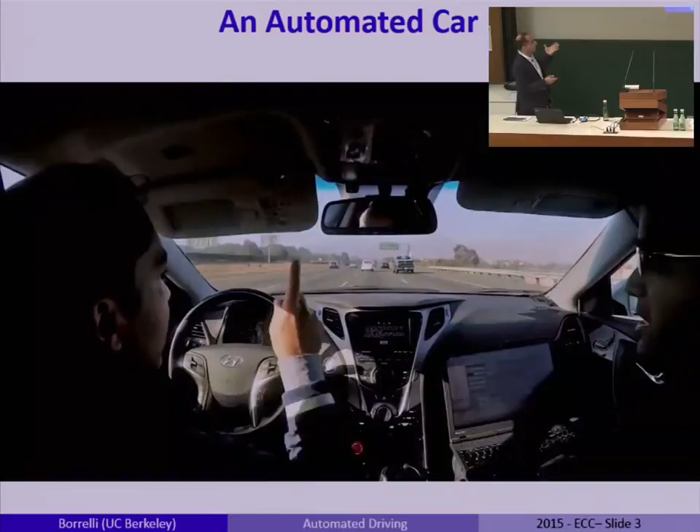This is an automated car. This is me driving towards Sacramento. It keeps the lane, it keeps the safety distance from the front vehicle. If you want, it can also steer. Why would you want to do that?

Three main reasons. There are 40,000 people that die in the US every year. Europe has the same numbers. They say that if you put all the world together, it's like a Boeing falling from the sky every day. If you can coordinate autonomous cars within smarter cities and traffic lights, you can reduce carbon emissions, there's no doubt about that. And most importantly, people want to look at their phone instead of driving.

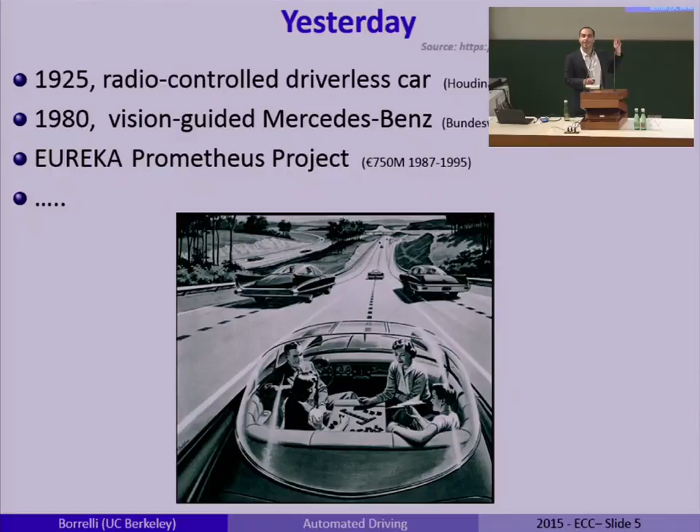So it's an old problem, right? In 1925, there was the first demo. You can look at Wikipedia. Europe had a lot of projects in the 80s with Mercedes-Benz. And if you follow this area, today you are overwhelmed by news about self-driving cars. You can read by yourself. I like this article from IEEE Explorer: 'Cars may think, but will they achieve artificial stupidity?' FBI, the ones that can be used as lethal weapons.

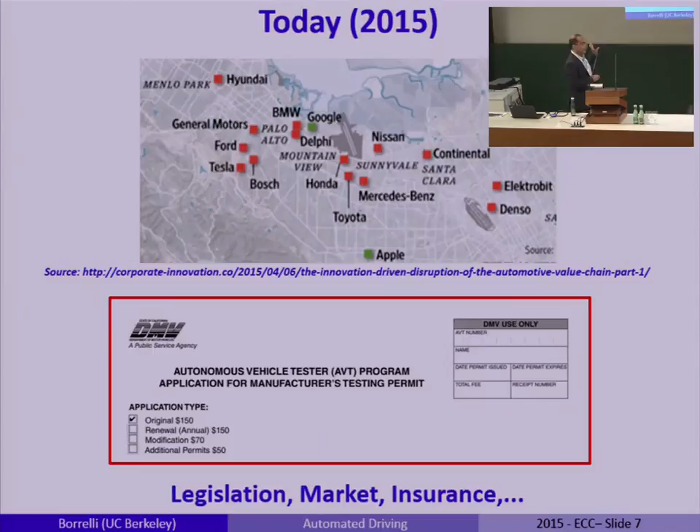Also, what is true, today in California you can get an autonomous driver's license. If you are an entity like UC Berkeley or Hyundai, you can apply for this. It doesn't cost much, and you can let your vehicle drive on the road. So things are changing from a legislation, market, and insurance point of view. I'm not going to talk about that.

This talk is going to be about how we engineer automated driving with a focus on control. I have 3 goals for the next 15 minutes or so. I want to give you an overview of our research activities, just an overview. I'll share with you a parking example that you can use in your advanced control class if you teach one. And I'll discuss one result of our research in analog optimization. Hopefully I'll be able to do all 3.

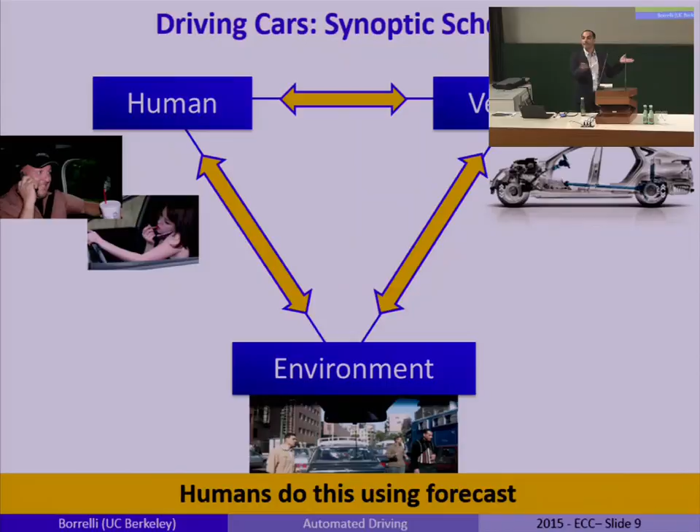So let's go back to the way we drive cars. This loop - human driving a vehicle that moves in an environment which is sensed by the human - works because humans use forecast. And if you're not convinced, at the end of this presentation you will be convinced. Even cars are designed so you can transmit forecasts, a blinking light, okay? So clearly, if you have a controller that uses a forecast on human, a forecast on vehicle dynamics, and forecast on environment, then the idea is that if that is well designed, you can make the whole driving experience safer.

And if it's actually very well designed, then you can even remove the driver from the loop, and you have, instead of an automated car, an autonomous car.

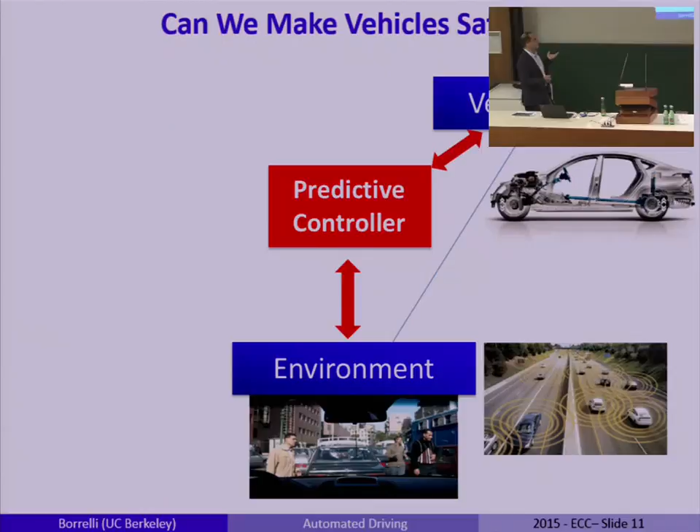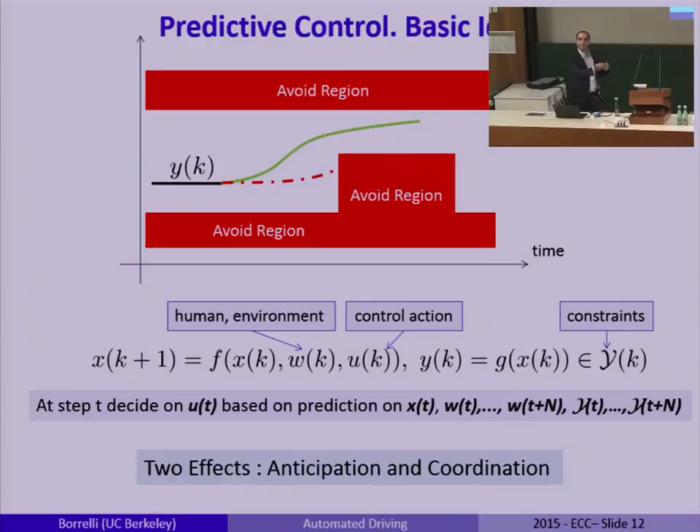You want to keep your vehicle within your constraints based on the forecast of your uncertainty over future steps. So how do you go from this very simple idea to actually designing in a systematic way control for autonomous drive? That's what I'm going to talk about next.

There are really 3 main steps: choose a good model abstraction, understand how good your model is by looking at your data, and third, design your predictive control. So I'll describe the first 2 first, and then I'll talk about predictive control design next.

Let's look - I want to share with you a little bit more about this loop. The human drives the vehicle using the classical interface. These are videos that we take in the lab to understand how this works. Many people think it's obsolete, but it actually works pretty well - steering, braking, pedals. Actually, in modern cars, when you interact with the vehicle, you're really sending a reference command to a lower level actuation system.

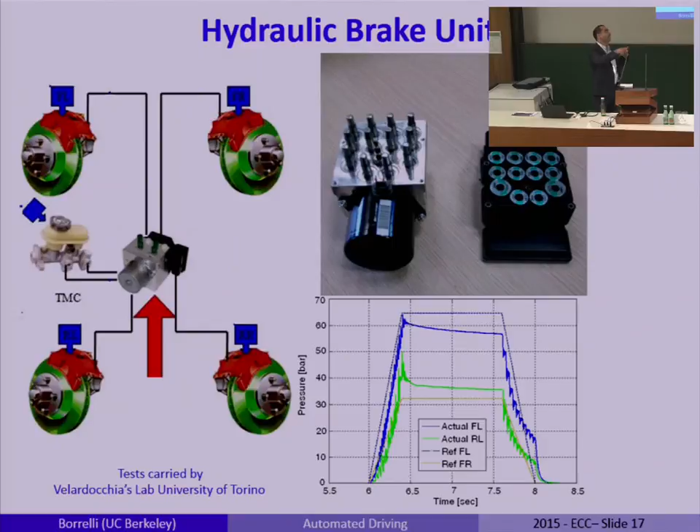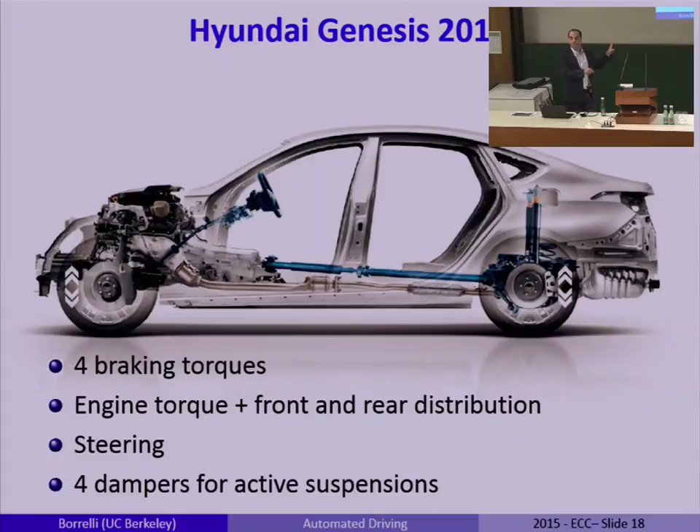Today, in a modern car, this is a Hyundai Genesis 2015, you really have around 11 or 12 control actuations. You control braking torques, you control engine torque, you control front and rear distribution, you control steering, you control dampers for active suspension. This is everything on the standard, series model.

Now that you have controlled the vehicle, it moves in an environment. There are two interactions with your environment. The first one is with the ground, and the vehicle moves because you have tires. These are complicated objects, viscoelastic materials. There are entire conferences just on tires.

On the left-hand side are finite element simulations we use for studying this phenomena. What you see here is a tire patch, the contact between the tire and the ground from a top view. As you accelerate, the elements of the tire stretch. They go from green to orange to red, and when they're red, the element cannot stretch anymore, it's saturating. When the whole patch is red, the whole tire is slipping.

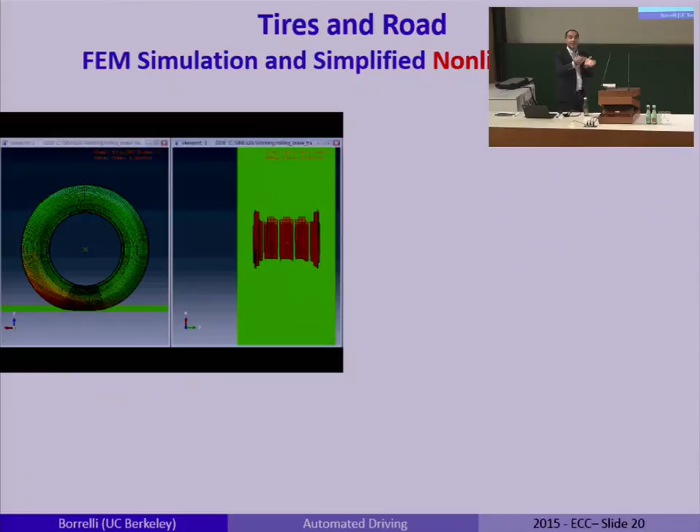It's a complicated phenomenon, and control people use this curve. The classical longitudinal force is a function of the tire slip, which is the normalized difference between vehicle speed and wheel speed. If you accelerate, the more you accelerate, the more longitudinal force you get, up to a point where your force actually decreases. That's when your tire starts slipping.

Similar thing if you brake. You push your braking pedal, you brake up to a point, and then your braking force actually reduces. The phenomenon is similar, same shape, but different amplitude, whether you're on ice, snow, or asphalt.

The other interaction is with the environment around you. So an autonomous car is equipped with LiDAR sensors, hidden here, there are 6. You also have differential GPS, inertial measurement unit, and cameras.

This is an object recognized by the camera. You also have radars; these are objects recognized by radars. With all these sensors, you try to do simultaneous localization and mapping, classification of objects around you, fault detection.

This is the vehicle going around a curve in Berkeley. You see all these objects, the radar's object, the LiDAR object with the cloud points.

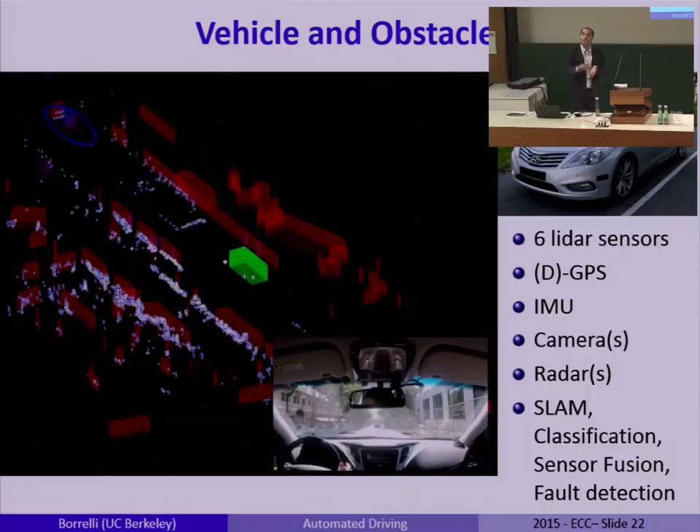And there's a lot of interesting work in what is called sensor fusion. How do you put all these sensors together? You try to come up with a fused object with a reliable and robust estimation of the current scene and the forecasted scene.

I'm not going to talk about that today. The focus is on control. Once the car moves, in a regular car, there is a human that senses the environment and controls the vehicle. So this is really the work of neuroscientists. And the way you sense the environment, you process it and you actuate your limbs.

It's very complicated. But what's happened lately is that there is an agreement in the neuroscience community that we use a mental model, a neural simulator in the brain, to predict what happens in the future and base our action on that prediction.

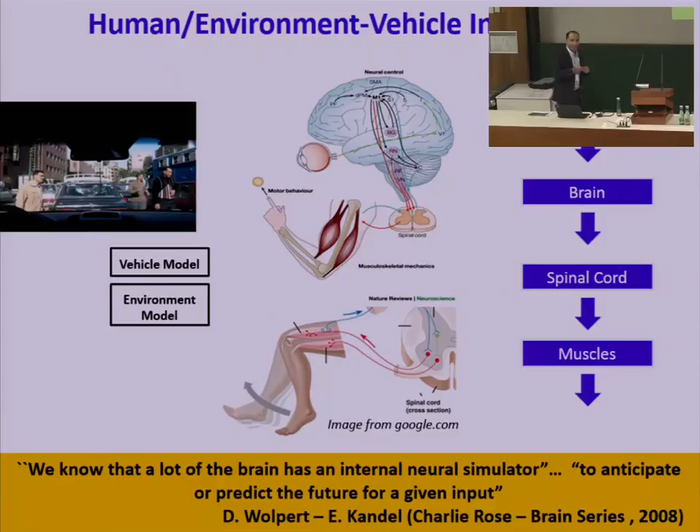So if you use this paradigm of a mental model, then you can explain why you need an ABS, anti-lock braking system, or a traction control. Your mental model is the green line; the real model is the red line. You think that the more you push, the more force you have, whether in traction or in braking.

Instead, actually, here you need a traction control to accelerate, and here you need an anti-lock braking system to decelerate. We do research in this area.

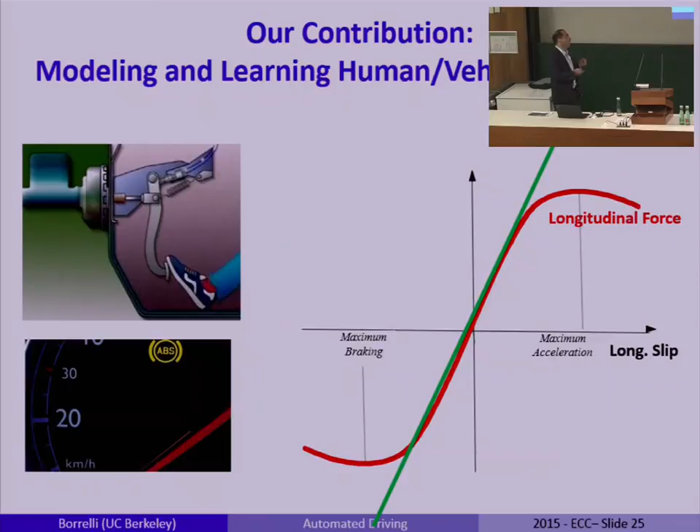For instance, if you look at lateral control, this is an expert driver doing a 90-degree curve. You see what he's doing is counter-steering.

He's steering his wheels to the right, even if he wants to go to the left. This is because he's giving the vehicle a small side slip, which gives the maximum lateral force.

Normal drivers actually don't have this mental model. Normal drivers are pretty bad. This is a 1-hour video collected afterward, same situation, 90 degree turn. They don't go at high speed, but the road is slippery, so you are saturating the tires.

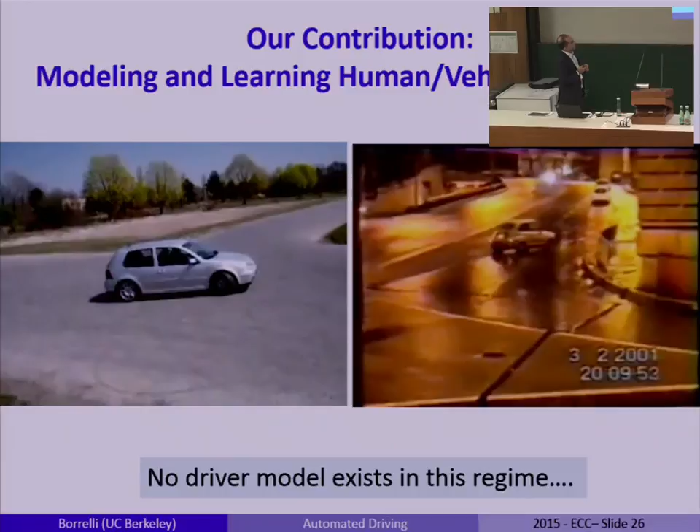We have been trying to understand what happens, why people do this type of crazy things. Usually I stop - there is a Fiat Cinquecento that goes around, and that's when I stop this 1-hour video. Here it comes now - the Fiat just goes the other way around.

So a lot of work in the past 10 years in my group on trying to understand human drivers. The message is that there is lots of data you can collect today - data about the environment, data about the vehicle itself, also data about the driver itself. You can put cameras inside, and we have drivers with eye-tracking glasses so you can see in real time where they're looking.

If you have good models, then you can do better control. You can actually train less skilled humans, okay?

The challenge is really that if you look at the neuroscience world, it's a much more complicated affair - a much more complicated problem. We are interested in personalized models rather than average mean behavior of a population. We are interested in a very complex task rather than moving a joystick in a controlled environment. And I don't trust simulators so much, so we really do experiments on the road, where you have a lot of uncontrollable external factors.

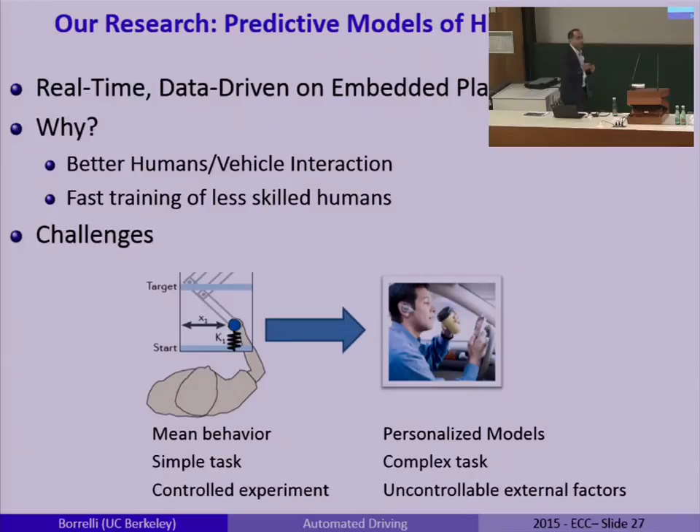So what are these complex tasks that we ask the driver to do? They go from high drift to parking to driving on highway to driving in an urban scene. Each of these scenarios has different challenges.

If you look at high drifting here, for instance, there is no obstacle. We ask an expert driver to bring the vehicle into a drift and then stop the vehicle at 180 degrees. Here what happens is actually a switched linear controller learned on the data works pretty well.

It works so well that you can use the same controller to do the same maneuver autonomously. What the driver does is destabilize the vehicle, control it in the nonlinear region of the tire, and then stabilize back to control in the linear region of the tire again.

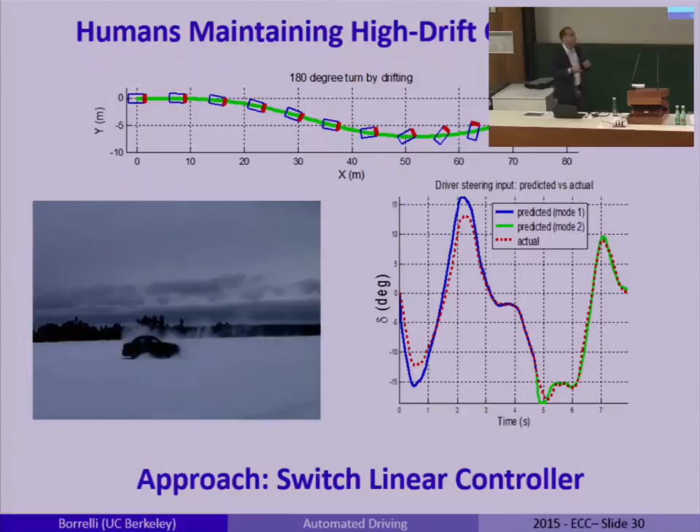This is Youngjin and Melanie doing autonomous drift control. This is a very fun project - I don't have time to talk about it, it would be a plenary by itself. But you see here the smoke coming out: the driver is doing the high drift condition, and the robot is doing the high drift condition at high speed, stabilizing the vehicle in the nonlinear regime.

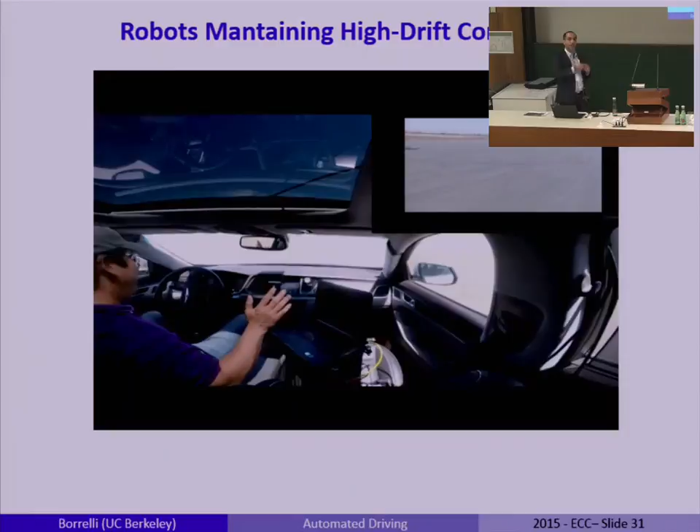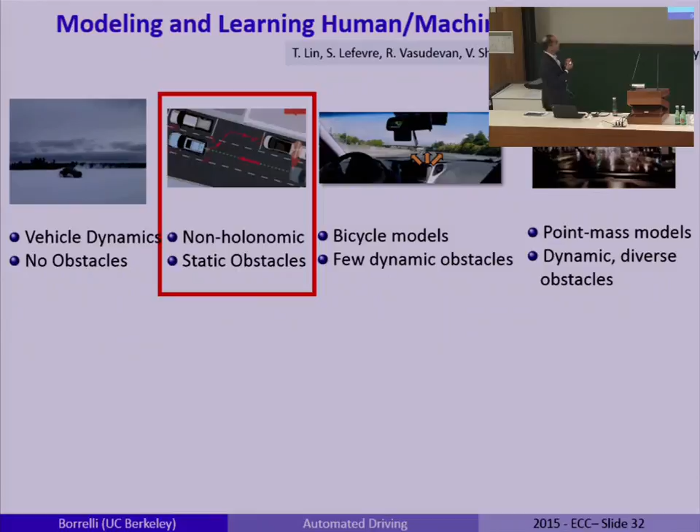Parking - very simple non-holonomic constraints. I'll share this example with you so you can teach it if you're interested in your control class. Georg Schildbach was here, and I've spent months making this clean.

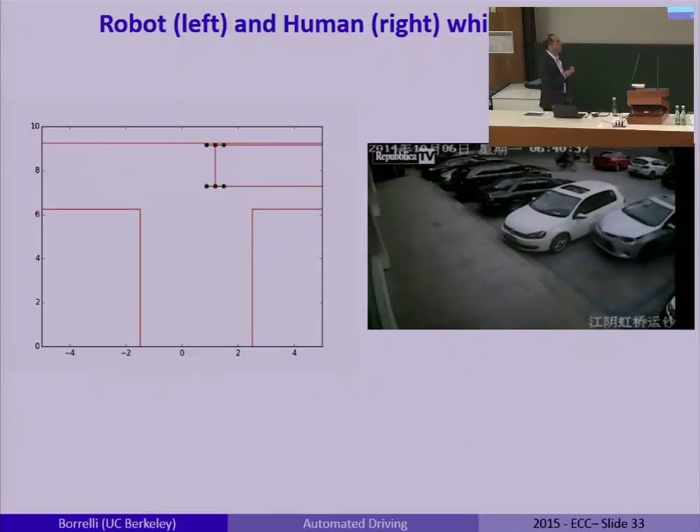This is something humans are really bad at. This is the control I'll share with you - the same problem solved very simply and nicely with an online optimization. We'll tell more about this, show you the models and the controller later. I've also spent a lot of work on highway driving.

Something that works pretty well is using a hidden Markov model, where you model the joint distribution between traffic and driver's actions. You can also use inside camera information looking at the driver. As you collect data, you learn the modes as well as the transitions between the modes.

You see the different drivers here, you see the modes that are learned as you drive. At some point it stops, and then when the model is learned, you do inference on the HMM to use this model to drive the vehicle. So why do we need these models?

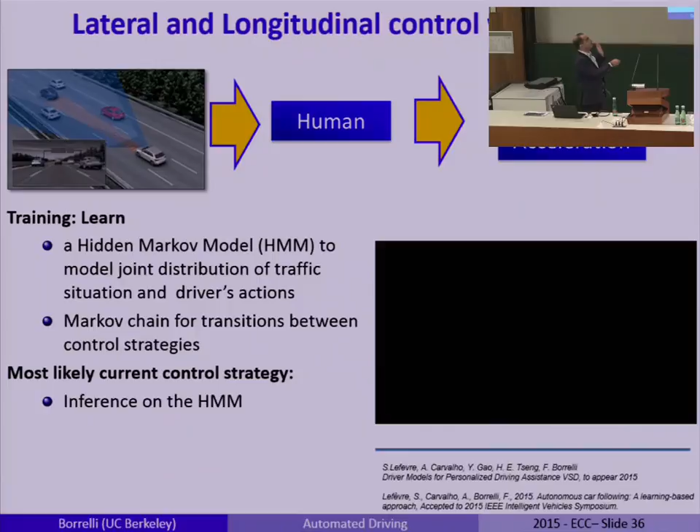For instance, lane keeping assist - this is a commercial feature today. If you use the model I showed you versus the commercial feature, in terms of time to lane crossing, you are able to predict lane departure half a second to one second earlier - and one second on a highway at 150 kilometers per hour is a lot.

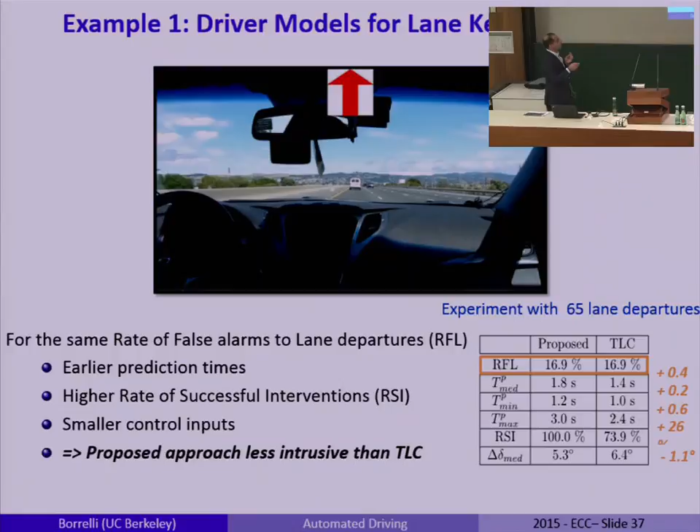Also, what you can do is what's called personalized driving - I'll tell more about this. The idea is that the car drives the way you drive.

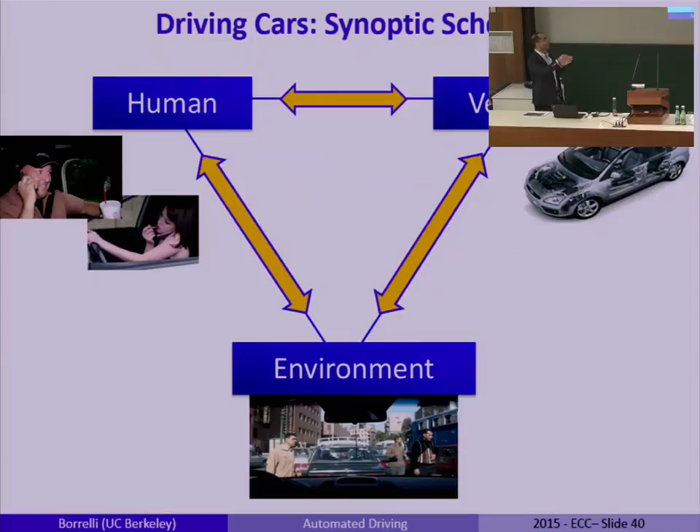So here is our loop. I think the idea was to explain a little bit more what's going on as you drive. And what is a good model abstraction?

So clearly this is the most complete model abstraction. Depending on which scenarios you're interested in, some of these will be more relevant than others - unless you are driving at high speed downtown when it's slippery and trying to park in a drift condition.

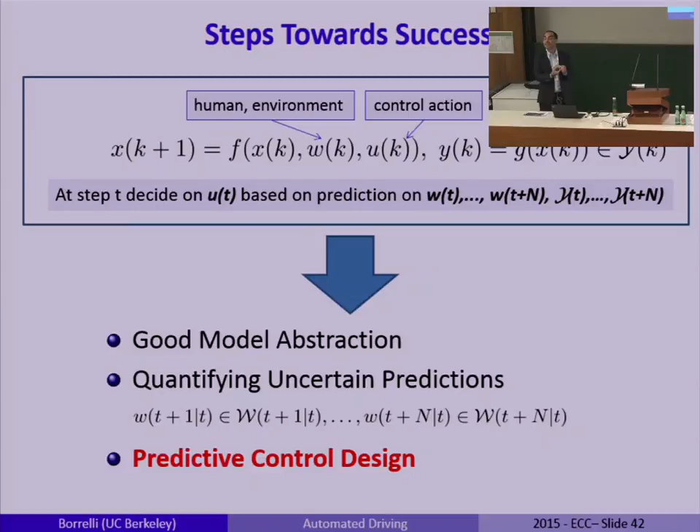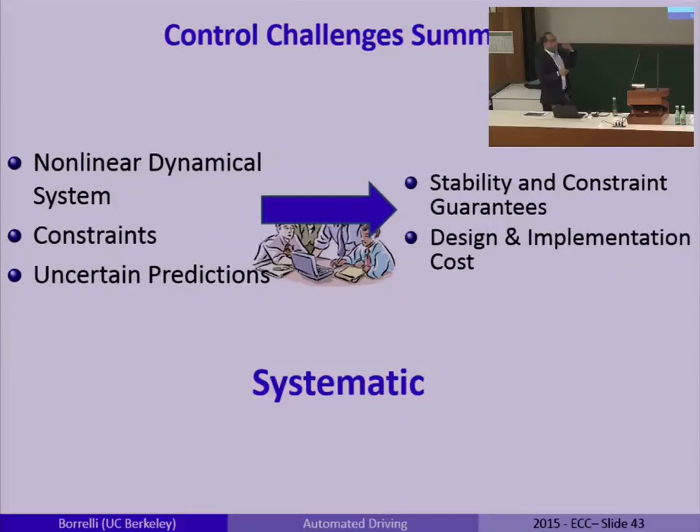So now that you've chosen your model abstraction, you want to do predictive control design. What do you do with this forecast? Here is your requirement, here is your starting point to the left. You want a systematic way to design a controller, and this controller has to run in real time on your automotive embedded control platforms. This is the setup I'm going to use to describe our research in this area.

It's a classical finite time optimal control. You're looking for a set of feedback policies, pi 0 through pi n minus 1, that minimize a cost function subject to a nonlinear state update equation. And what you want is that the feedback policy satisfies input and state constraints for all your support set of uncertainty.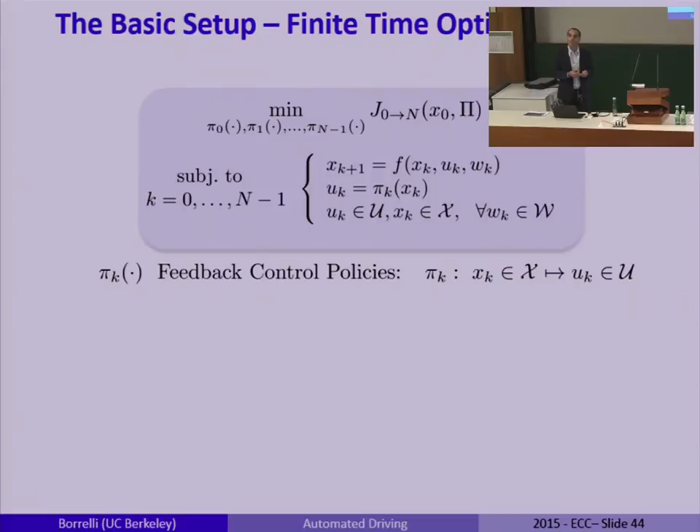What I'm going to talk about is computation - how do you trade off conservatism versus complexity? So how do you compute this type of policy today? Very big picture, without going into much detail, you have two options.

One, I call it offline based, means that you pre-compute the feedback policy offline, and in real time your evaluation of the feedback policy at a given point is very simple. Dynamic programming is one choice - it's only one of the possible choices. N greater than 5, number of states greater than 5, is basically impossible, because the simplest form that everybody uses, with the exception of a special class, is a piecewise constant policy, which means you have to grid the state space. You cannot grid if you have n in this range.

The other option is online based. Offline, what you do is just set up an optimization problem, and online uses a sophisticated algorithm that does a lot of computation - it gives you pi of x at a given point. Nonlinear predictive control is one choice. There are hundreds of robotics algorithms here that fall in this class. Basic rule: avoid homemade solvers. I'll tell you more about this in a second.

So I was looking, while preparing this presentation, I looked back and asked what has changed in the past 15 years - this is when I got my PhD, 15 years ago. I'll give a biased story here, but there are two things that have changed. One is that there are excellent non-convex open source solvers now - they were not available 15 years ago, regarding the online based approach. And if you look at autonomous driving, few people really use it - robotic algorithms like particle filter, rapidly exploring random tree, and many others are prevailing instead. There's a very simple reason for this: general purpose optimization solvers do not allow for reusability, or what operations research calls in-place problem modification.

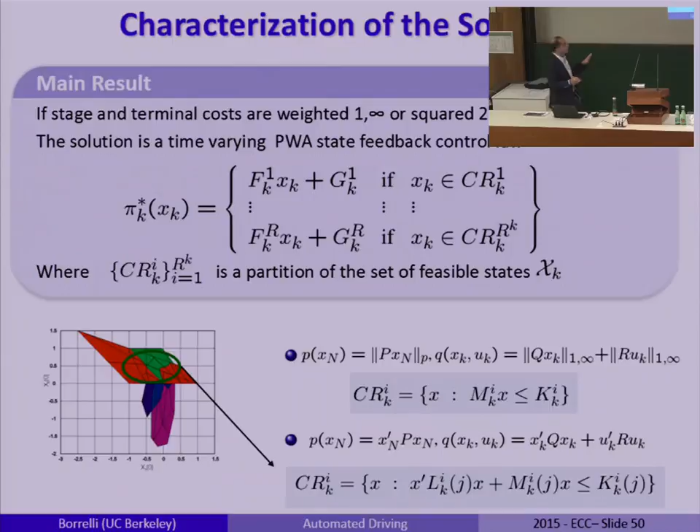Short story is there's really one option: the feedback policy is piecewise affine if your system is polyhedral piecewise affine and has polyhedral constraints. What's the rule? It doesn't really matter the number of states because you're not gridding. You can solve problems in 100 dimensions with one constraint.

The number of constraints that become active over the horizon does not need to explode, and unfortunately you don't know this unless you solve the problem. So you solve it if you can manage it, fine. Otherwise, you forget about this approach.

It's been very powerful for small MPC problems, and there's a huge number of very good people in this audience that have basically pushed the real-time MPC effort in the past 10 years a lot. Very good online optimization algorithms, mixing option 1 with option 2, pre-computing more offline, lots of work on FPGA and GPU - the list of people to acknowledge here would be too long.

The fact is, if you look at a problem like this - if you're teaching an advanced control class - this is lateral stabilization of a vehicle. You have 4 states: longitudinal speed, lateral speed, yaw rate, the error with respect to the desired yaw angle, and the error with respect to the center lane. You want to stabilize this vehicle by acting on additional steering and braking.

There is a driver that controls the speed and steering, but doesn't know how to drive - you have to help him. You have nonlinear tires, and you're doing this on ice. So you piecewise linearize the tires: you have this piecewise linear model, 3 modes in the front, 3 modes in the rear - a 9-mode switched linear system.

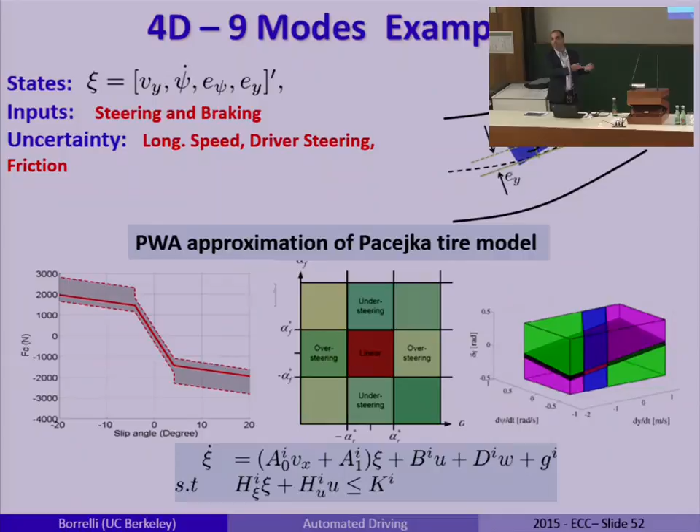I do not know of any other way of doing this than the method I showed you before. You run this with the MPT Toolbox, you get a few hundred regions, and you can upload it into the controller on the ECU. The driver thinks he's driving, but actually the wheels are going in the other direction, and the controller is doing differential braking.

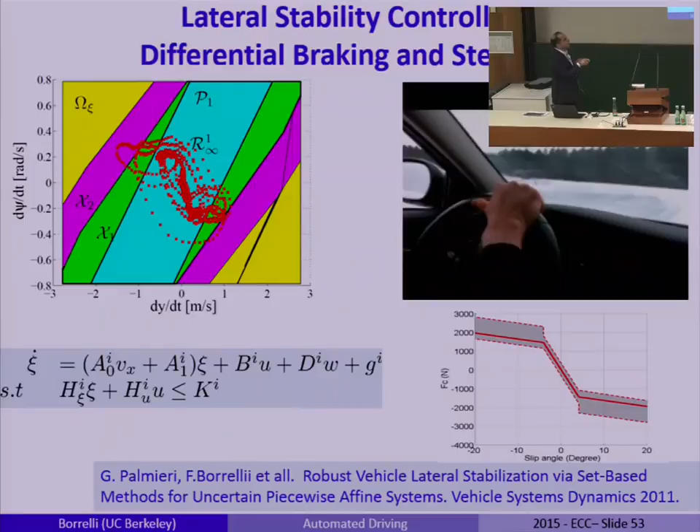That time, we didn't have the drone. Now we have cool videos with the drone looking at the wheels - maybe I'll be able to show that.

If you buy a Mercedes S-Class - I know this is not the right audience - I cannot buy either.

You basically have the controller project I showed you for doing adaptive cruise control - it's an explicit solution.

If you're doing engine manipulation, this is work they're doing with Honeywell, together with Jaroslav Pekar, who is in the audience, and Greg Stewart. There's this very cool tool that allows you to do control design for some classes of engines using this approach.

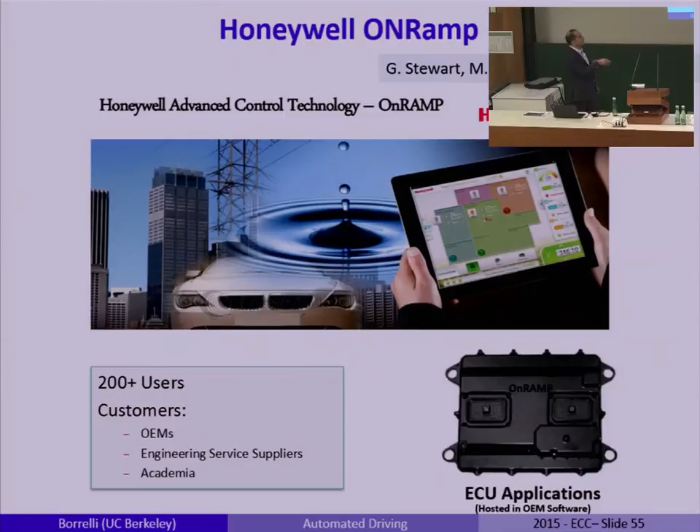Finishing with a parking example. I'm showing this because it's a case where you cannot piecewise linearize - the things I showed you that I did in my PhD thesis do not work. This is the simplest model, a kinematic bicycle model.

You have a product between cosine and velocity. It's a 4-state system. You control acceleration A and the steering angle delta. There's no way you can piecewise linearize this.

So how do I design the control? Let's make it even simpler - let's assume I go at constant speed and constant steering angle for some pieces of my travel. So your unknown becomes the distance between the rear axis and the instantaneous center of rotation, r - this goes to infinity when you're going straight - and beta, the traveled angle along your arc.

You go from a kinematic model to a geometric model. Here's a very simple equation: if you use distance r and travel angle beta, the next time step you'll be described by these 3 simple equations.

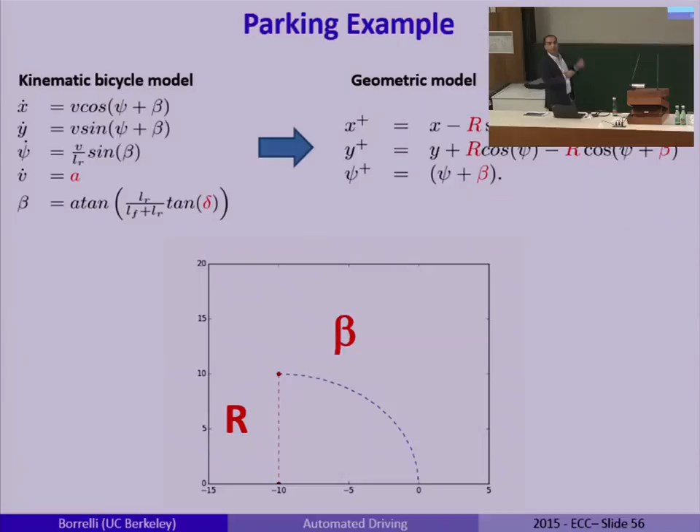Very simple geometric model. You want to design a controller that parks in a given spot. You have vertical parking, tilted parking, parallel parking. You have nonlinear, disconnected sets, because you can turn left or right, so you go from minus infinity to a minimum radius, and from plus infinity to a minimum radius. Then you're given obstacles, an initial position x, y, and angle, a terminal x, y, and angle. So you can park - it's a 3-dimensional problem, and you want to find the input sequence which parks the vehicle.

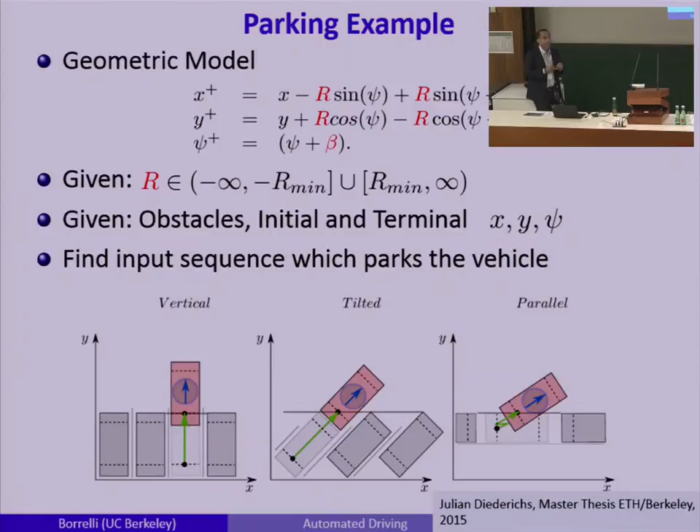So Georg and I, this is what we want to share with you. You go on mpc.berkeley software. There is software for solving this problem with dynamic programming and with online optimization. Georg and I spent literally 2 months cleaning this up, and I'll be using this in my advanced control class because I was fed up teaching dynamic programming for the linear case, x dot equals x plus u.

So by the way, what are the results here? If you're doing online optimization, or if you're computing the feedback policy, it takes the same time - milliseconds for 2 steps or 2 segments, half an hour if you're using multiple steps. But this one is for a given point, this one is the whole policy. So dynamic programming for this in 3 dimensions is really 1,000 times faster. That's really what you want to do.

What are the challenges? For nonlinear programming, you really have 1 parameter, the horizon length. Dynamic programming is 500 lines of code and 25 parameters, because you have to grid in 3 dimensions, you have to grid the input space. It's complicated piece of software that Georg has done a very good job with.

You have seen this, the car bouncing - this is a geometry, you're just computing the path, so you still need to compute the acceleration to your vehicle. So you're going to have a low-level path following problem. Instead, if you're using a kinematic model, you're computing steering and acceleration at the same time. Dynamic programming using kinematic models goes to 5 dimensions - not a classroom example.

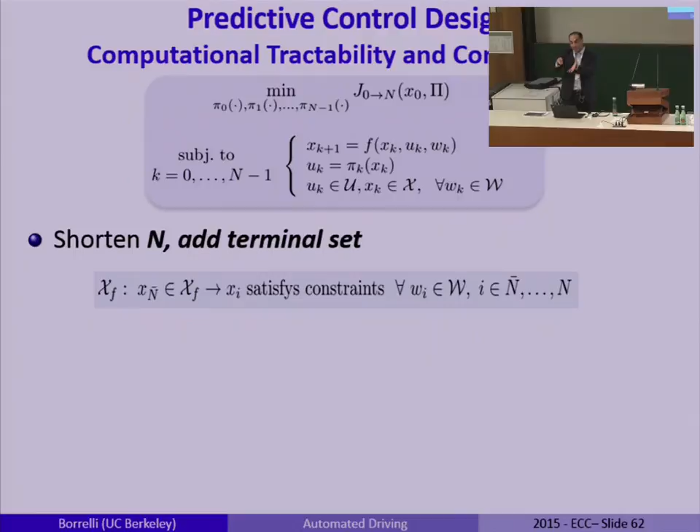But the big picture, very briefly, is the following. The first thing you can do is shorten your horizon - if the horizon is too long, make it shorter. What you need to do is add a terminal set to make sure that the state where you land will be able to satisfy the constraints. We do use this approach - for instance, in our highway pilot, we let the driver model drive, and then we have a safety set, which is called a robust invariant set, at the end.

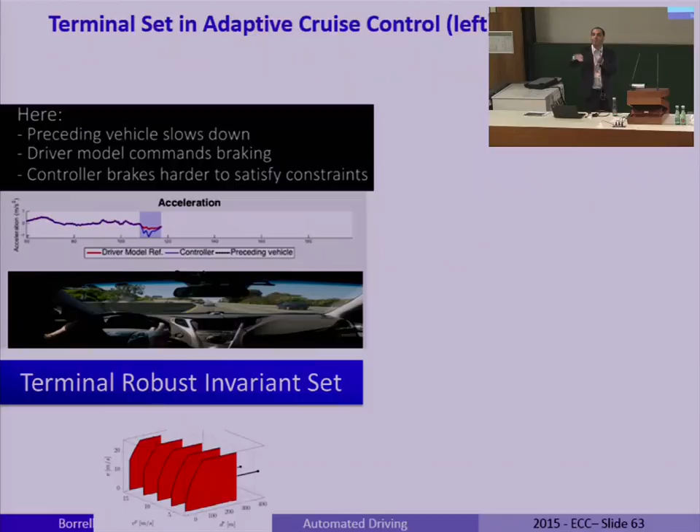This is a scenario: there was a car that cut in. The autopilot didn't decelerate enough, so the lower level control system, to enforce the robust constraint, added an additional braking force.

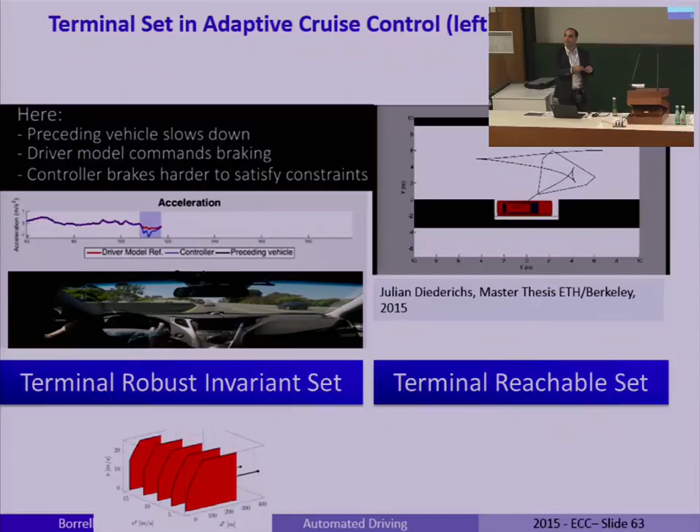It would require a fine grid. So the other thing you can do, instead of looking for any feedback policy, is look for just a subset of feedback policies. You can look for just linear feedback policy over the horizon, or just constant policy over the horizon, because you are re-optimizing anyway. As you go down in this list, the set of feasible states shrinks.

Meaning that the car will be safe, but will travel only at very low speed on highway. The parking problem, you'll be able to solve parking only for a given set of configurations.

Because the set shrinks, the other thing you can do, instead of doing robust constraint satisfaction, is relax the constraint satisfaction, allow for the constraint being violated only by a small epsilon. You heard a beautiful plenary this morning about this topic.

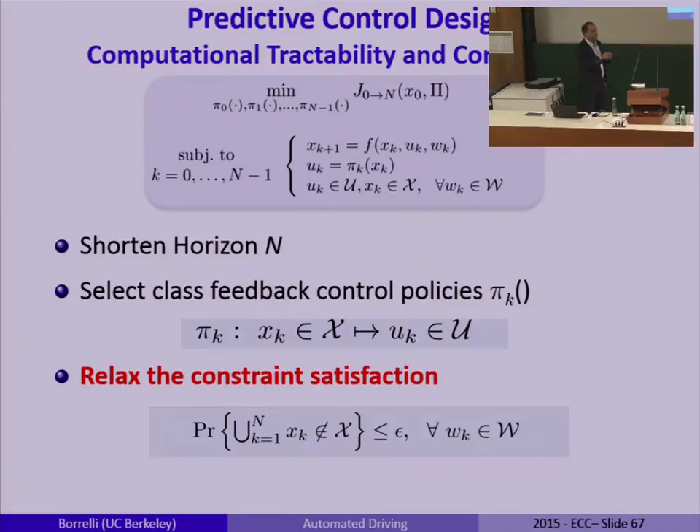Big picture is that it's a challenging problem, right? Now the uncertainty is a random variable, you have to propagate the statistics, and you have to transform the chance constraint into the deterministic constraint, and this is a multivariate integral, complicated to solve.

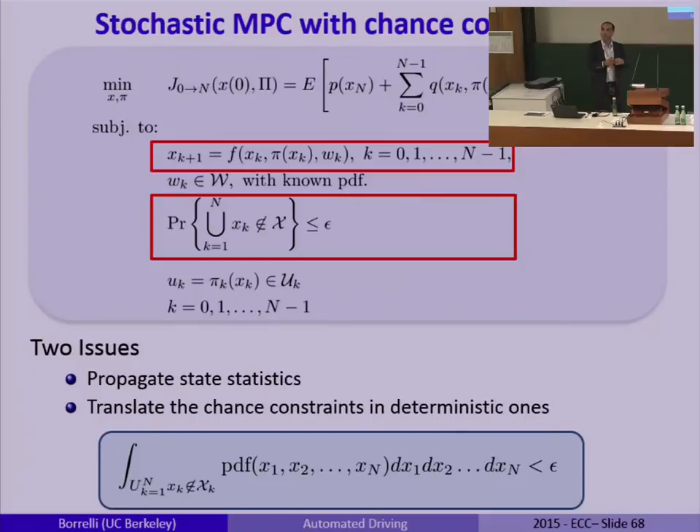Two main big areas: explicit method and particle method, sample-based methods here. We are using both, and I can talk more about this later.

Last option that you have: once you have transformed the optimization problem into a mathematical program where the initial state changes the right-hand side of the equality and inequality constraint, the cost function - this problem has a special structure. This is block diagonal. You can exploit the structure and run this fast on embedded hardware.

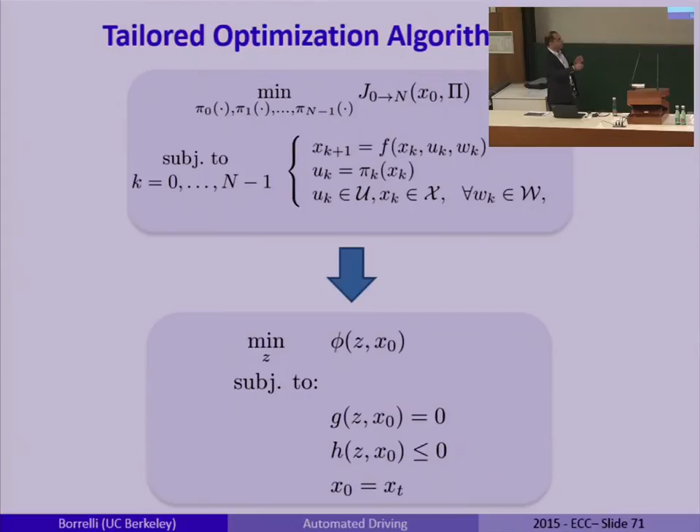There is an interesting European project trying to focus on this. The idea was to give you an overview of the research we do. We do research in this area, okay, and we use all these things to make a nice, systematic design of our autonomous highway car.

We have a driver model that drives the vehicles, a personalized driving - you can drive the way Ashwin or Stephanie drives. You forecast the scene. And by the way, if you want to know more details for forecasting the scene, we use a Markov jump linear system.

The way people drive around you is estimated in real time using least squares and clustering, so that you can quickly understand what they are doing.

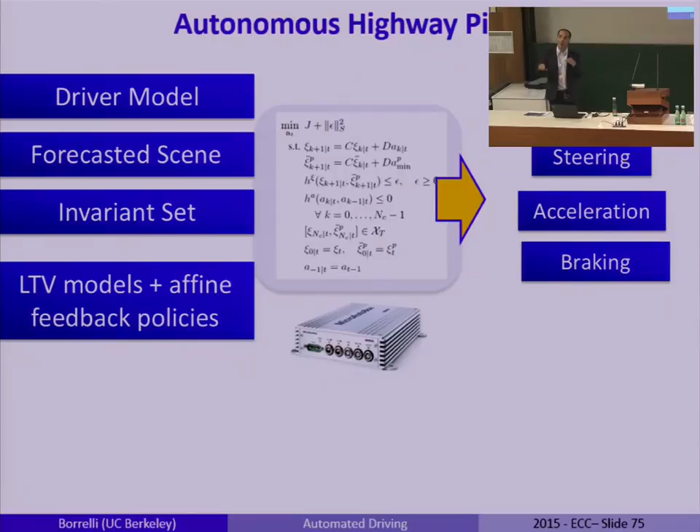Once you have forecasted the scene, we use an invariant set, the terminal set, to enforce the safety. To make it tractable, you have a linear time-varying model plus affine feedback policies.

And we use chance constraints. This part here is quite standard, you can look at the MPC literature. You usually linearize around previous trajectories, and you optimize around a feedback policy.

If you assume these are Gaussian disturbances, then you have explicit formulas to propagate the statistics. And this is an example that shows, when there is a car, this is the actual trajectory, and this is our forecasted trajectory.

It becomes bimodal really for a few seconds, where you really don't know if it's going to turn left or right. Otherwise, a Gaussian approximation is not too bad.

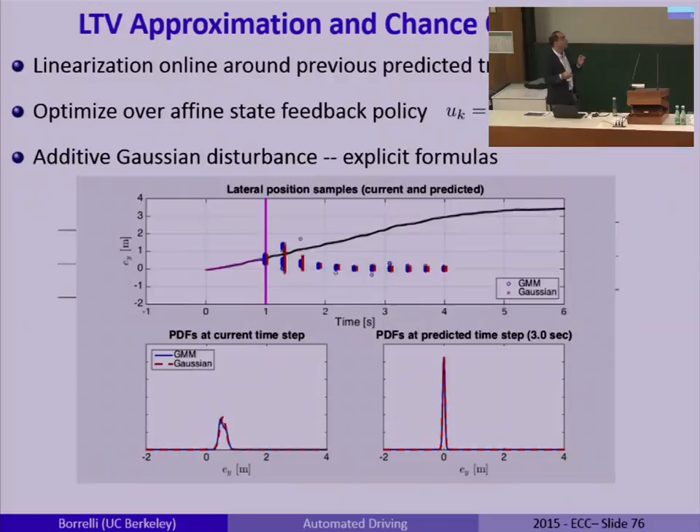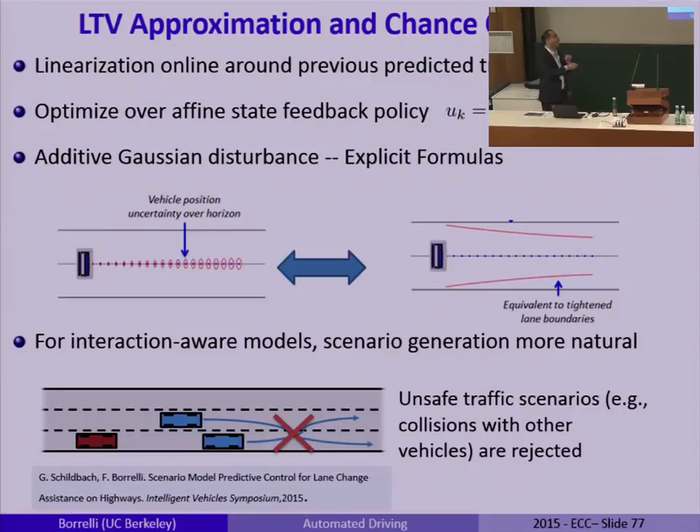Georg Schildbach is exploiting recently more scenario generation for this class of problems, and it's interesting because there are interaction-aware models, and doing statistical computation with joint probability distributions is very complicated. This seems to be a more natural way of doing it, where you sample the possible trajectories and reject things that are not likely to happen because this would lead to a collision. You can talk to Georg for more details about this.

You need two people to drive an autonomous car. Here you see changing the driving style. So I'm switching to Stephanie mode. Stephanie likes to drive close to the cars.

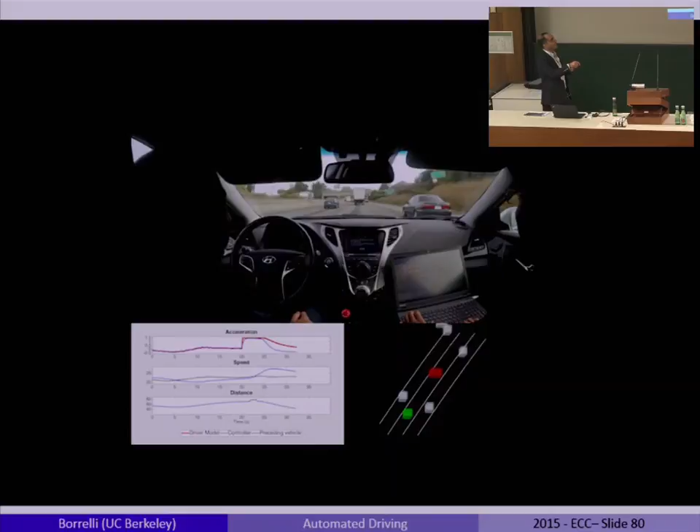The time where I was almost taking action here is because actually the LiDAR didn't see this obstacle to the left. It was quite dangerous.

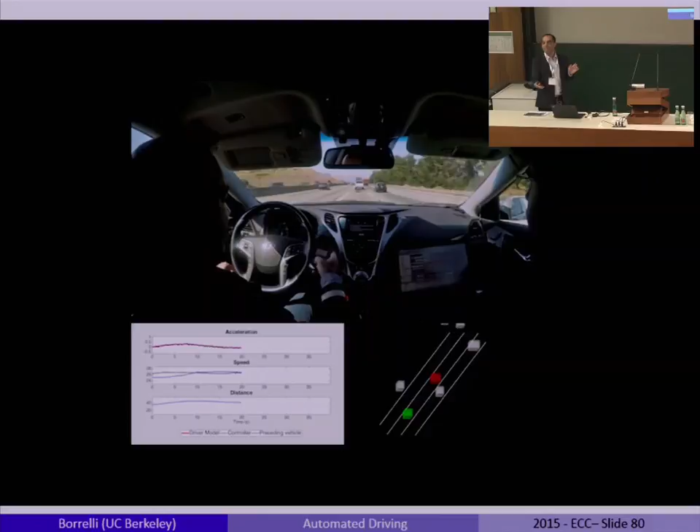I don't play this long time because, you know, when people show you videos, they're always the time when it works. You don't know all the times it doesn't work. Actually, it's more interesting when it doesn't work. This is me not playing with the phone.

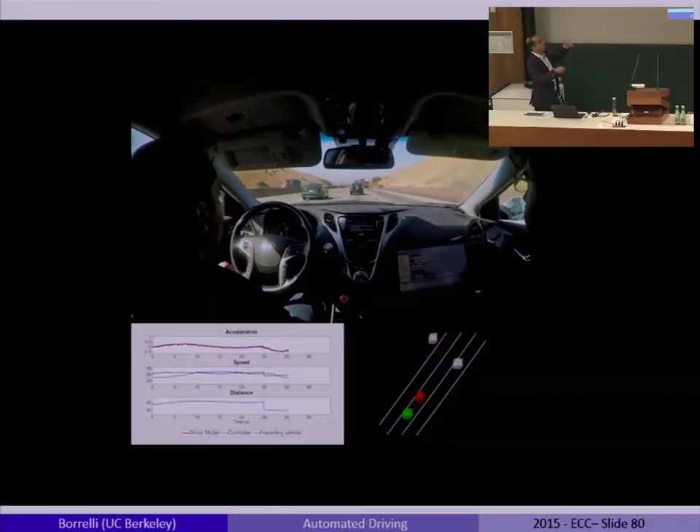Here, there was a cut-in vehicle. The safety set kicks in. The controller brakes more than the driver model, and things go on.

Well, this concludes the first part of my talk. In the last, I believe, 10, 15 minutes, I want to show you the details of one research result.

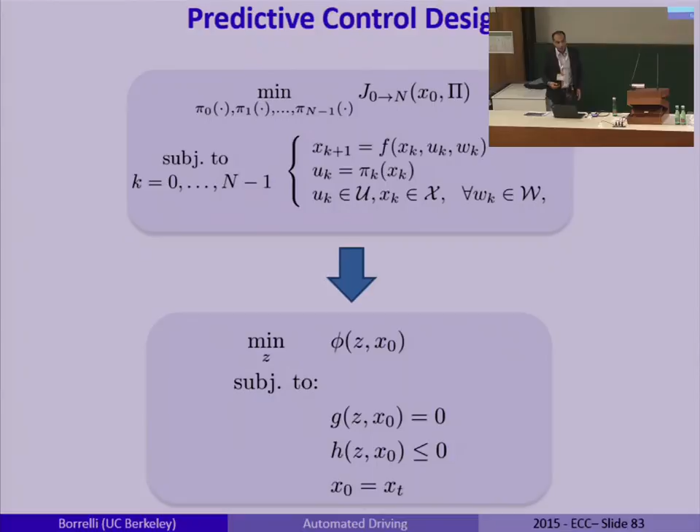This was, Sergey started working on it. I was very skeptical 4 or 5 years ago, and now I'm presenting it because I think it's actually a pretty cool result. The other reason is, if you look at CPU speed, basically it has been stalled for the past 10 years.

Final result is we designed a very simple electrical network that solves a quadratic programming problem with changing right-hand side. So this is a QP, a convex problem with strictly positive definite Q. So it's a convex QP.

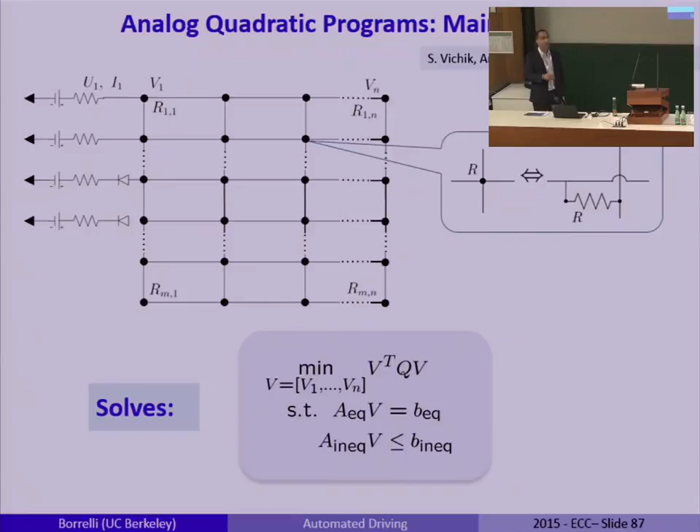The elements, this circuit is super simple. And that's also why I've decided, I think in 10 minutes I can explain you the main idea. The dots here are resistors connected in this way. So the resistors are computed from the equality constraints of the QP, the inequality constraints, and the cost matrix. So, a set of resistors that are linked to the cost matrix.

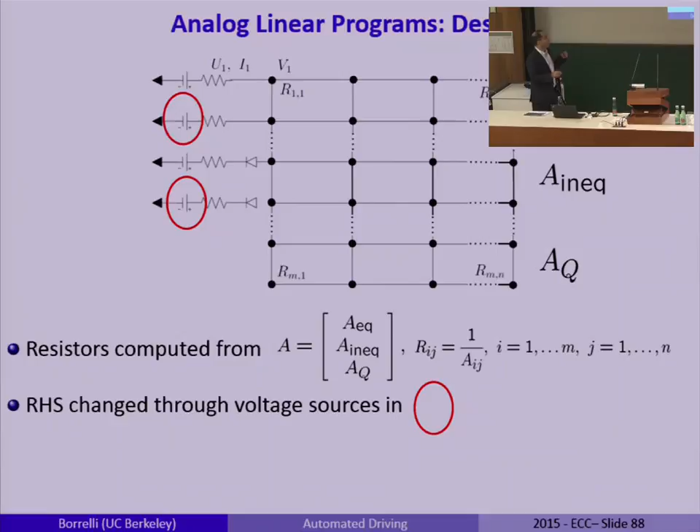The right-hand side is changed through voltage sources here. And the resistors, the circuit has only positive resistors, they're all the dots. Negative resistors, I'll say more about this, they are here. Voltage source and diodes for inequality constraint.

How does it work? Very simple idea. You use basic Kirchhoff laws. If you take a set of n resistors connected to a common node, U, you know that the voltage in U is proportional to the voltage drop across the resistor using this formula here.

If you set the voltage U to this equation here, then you end up with a set of equality constraints on V1, Vk, Vn of these voltages. So what you have to enforce is U, these voltages, to be equal to this right-hand side. This right-hand side, this quantity, is positive, it's B and it changes, right? So this is a voltage source.

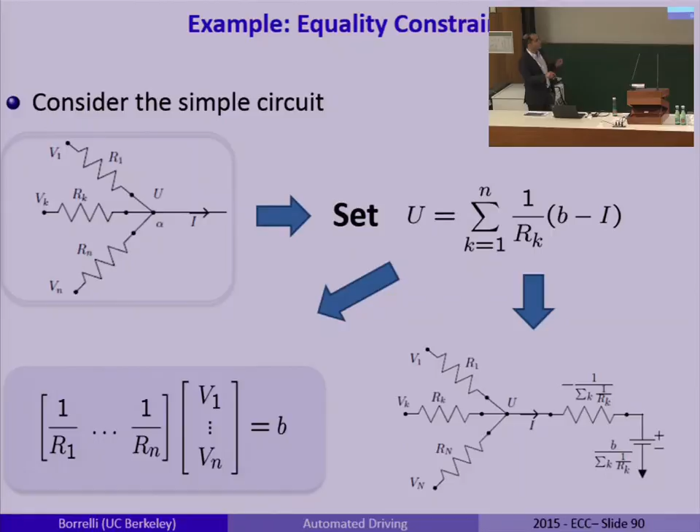And then the sum minus I is a negative resistor. So if you take this mesh of resistors, you put a negative resistor here. This negative resistor is a function of these resistors here. And you have a voltage source. You have an equality constraint. Then you can change the right-hand side of the equality constraint by just changing the voltage source.

If you take now, put a diode in, then you have an inequality constraint. Okay?

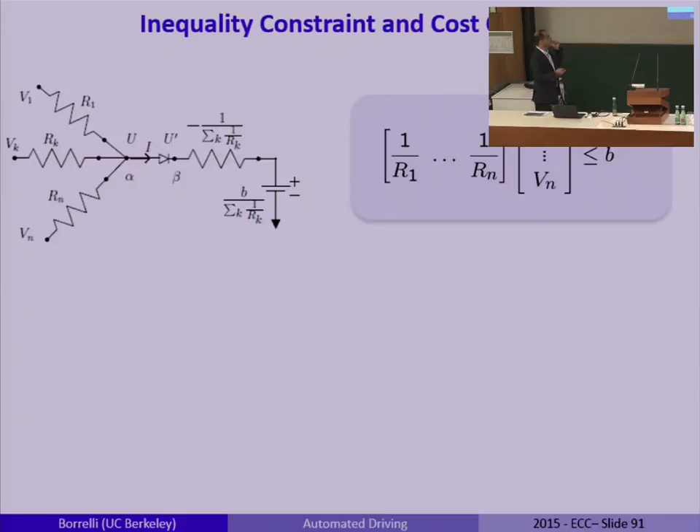If now you have equality constraints, inequality constraints, and you want to minimize your quadratic cost, just use fundamental laws. You know that for a given input current, the distribution of currents will be such that the least power dissipation is achieved, meaning if you have n resistors connected, the current will distribute so as to minimize this Q function of the n resistors.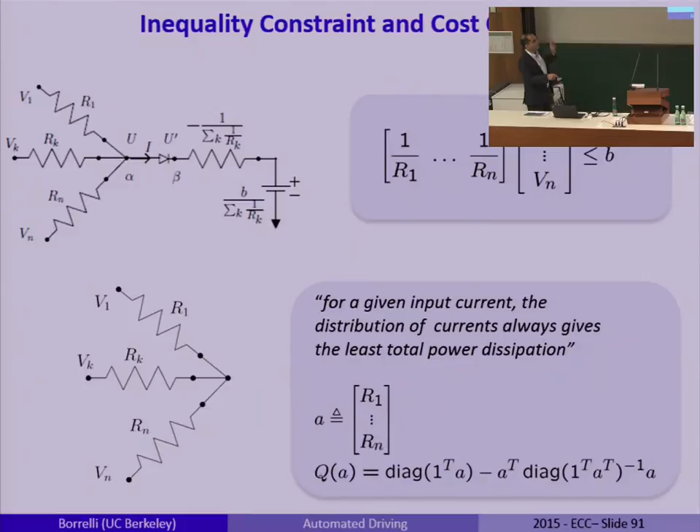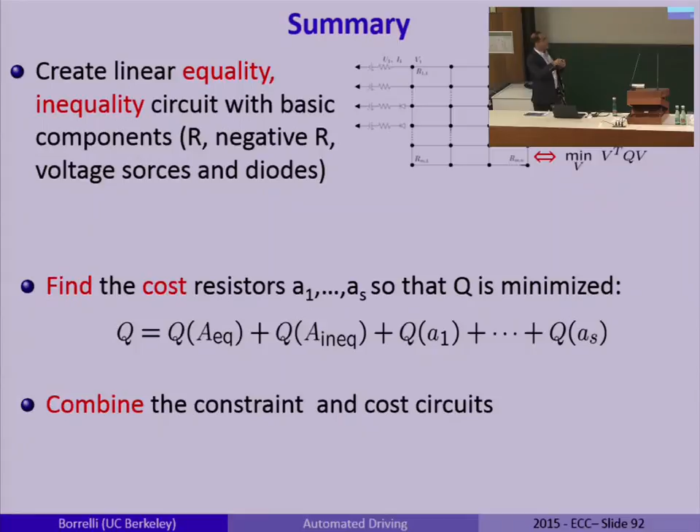Short story: put it all together, you create linear equality constraints and linear inequality constraints just from your A matrix. You need resistors, negative resistors, and a voltage source. Then you are given a Q, and you add additional rows of resistors so that the total dissipation equals your Q. There are formulas in the paper for how to compute A1 and AS. Combine it all together, and you have a circuit that solves your QP.

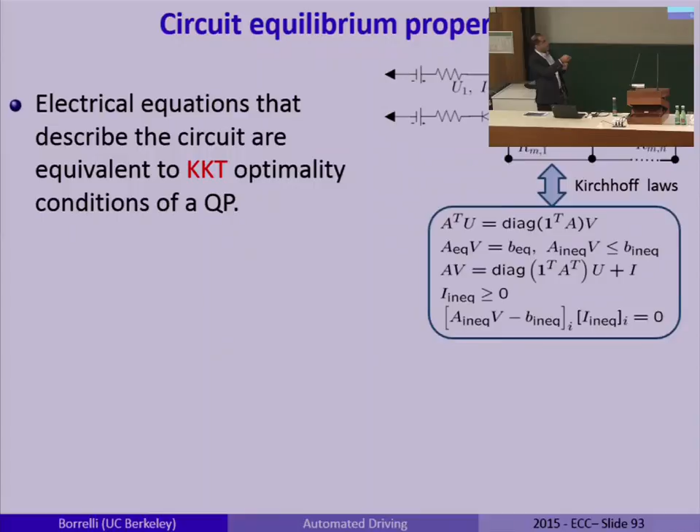The way you prove it is through the KKT conditions: you write down the KKT conditions of the QP, you write down the electrical equations of the circuit, and they are the same. It turns out, not surprisingly, that the currents represent the dual variables, and the diodes enforce the complementary slackness condition.

Does it work? That's the first question I always ask. Now, the circuit is pretty simple, and you see this is why it's fast - this is the main difference with the work in the 80s, which had capacitors and complicated things everywhere. This is just a resistor mesh: equality constraints, inequality constraints, cost function. The problem is really these switches and the negative resistance.

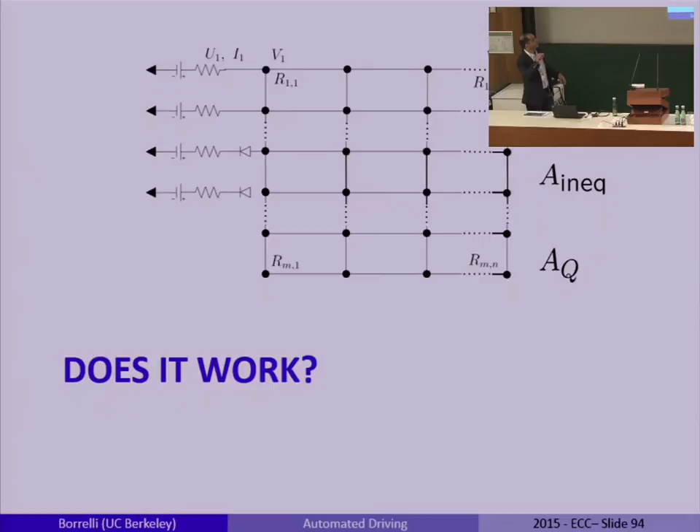So you really have to figure out how to code that. The negative resistance you can implement using an operational amplifier. The switches have a major parasitic effect, with a capacitance here. Then you take the positive resistance and model it as an equivalent network. So you have negative resistance as an op-amp, the switch as a diode model with parasitic capacitance C, and the network is lumped all together with Rm.

And this circuit now can be unstable, because it's an electric circuit with switches and negative resistance - clearly it can be unstable. So I've been trying to understand how I can make this circuit stable.

The model: what you do is model the whole network as an affine hybrid system. Here is your positive resistor network, here are the negative resistors, and the switches here for the inequality constraints. Put it all together, and you end up with an affine switched system.

The switches are a function of the diode state. The A matrix of your affine system is a function of the coupling, depending on which switch is open and which is closed. There's a block diagonal term on each row, represented by the equality, inequality, and cost circuit, and this element is a 2x2 matrix which is a function of epsilon and gamma.

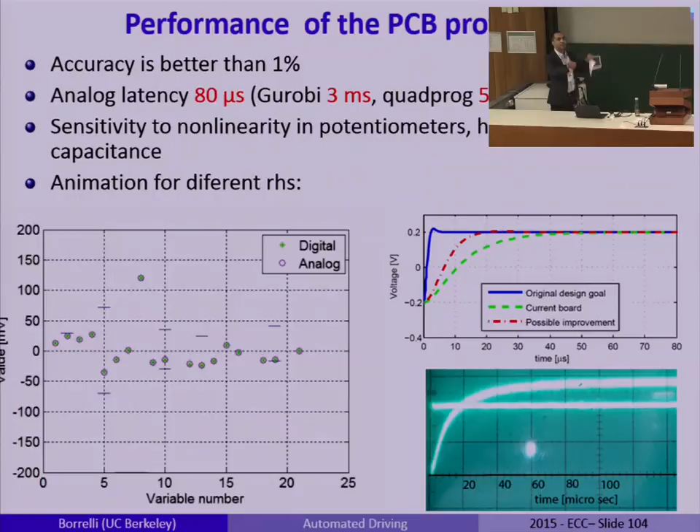Crystal and advisor Elad decided to move away from resistor networks. There were problems I can explain later, but we went to fully differential switched-capacitor circuits. So the variables are coded as capacitors here. This is a very small QP, 4 by 4, with high-fidelity simulation.

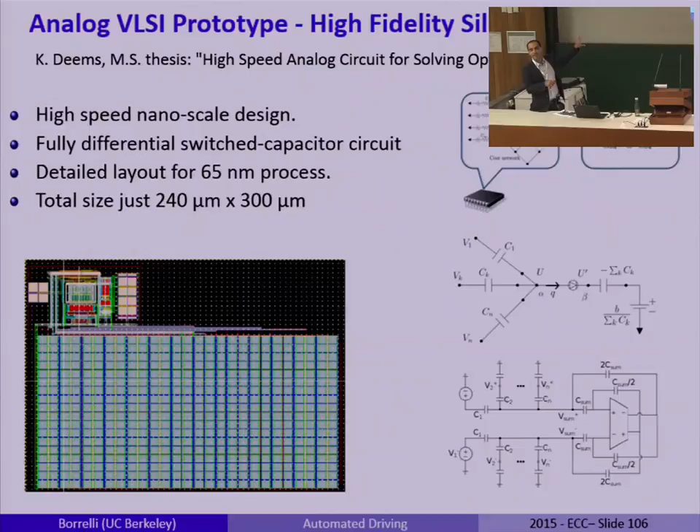This is the last simulation before printing the VLSI circuit. The settling time is 50 nanoseconds, accuracy better than 1%. Power of 200 picojoules to solve the QP. Your computer actually takes 500 picojoules per flop. This is 200 picojoules to solve the QP versus 500 picojoules per flop for your computer.

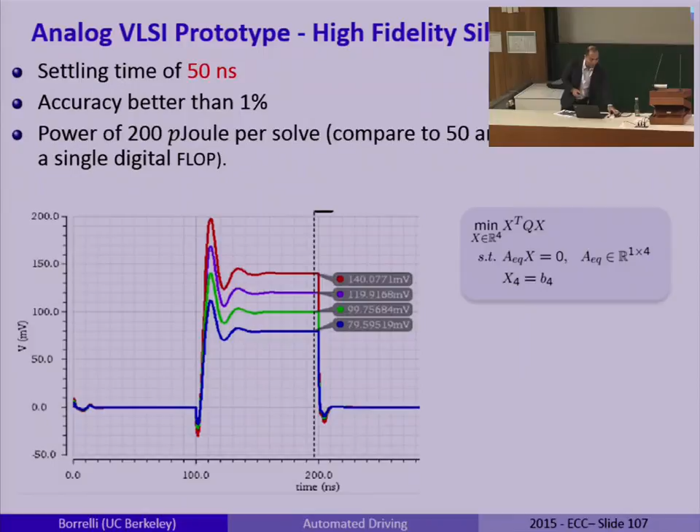Better hardware will go from 50. The range is from 50 to 500. I think on this note, this is all I wanted to cover. I am done with my talk.

I want to give you an overview of how to engineer automated driving, tell you a bit more about what we're doing at Berkeley with our research activities, and share with you a parking example. If you're fed up of x dot equals ax plus bu, you can use the code and the example, which is quite neat for parking the car. Then I want to discuss just one result, which was analog optimization.

It's an interesting problem. There are lots of control problems in there: real-time optimization, filtering, fault detection. For some reason it's dominated by the robotic community, and I don't know why. There are also very interesting questions on what happens if the car kills a pedestrian—interesting, but I didn't have time to talk about that.

My personal view is that there will be more need for real-time optimization with data feeds, and there will be a lot of work on embedding humans rather than disconnecting humans. If everybody tells you there are 40,000 people who die every year in the United States or in Europe, nobody tells you how good we are.

We have one death every 100 million vehicle miles, and this is in every condition - slippery roads, drunk driving, everything. So that's actually the goal you have to achieve with an autonomous car.

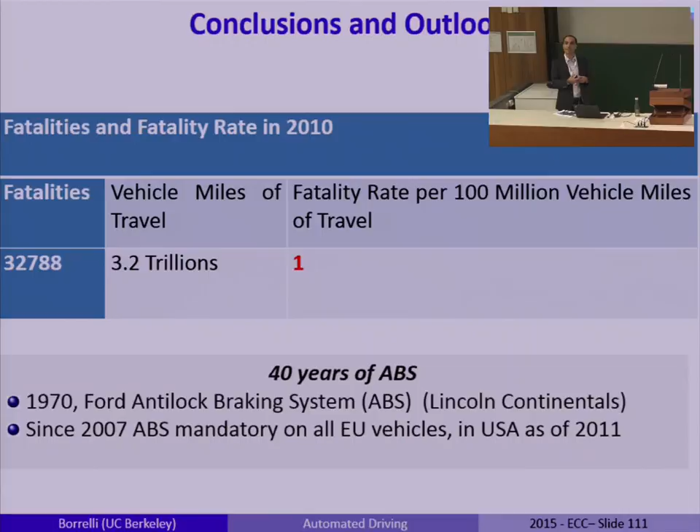When people ask me how long it's going to take, well, it took 40 years for a very simple system, which is ABS, anti-lock braking system - that's 4 sensors, 1 actuator. From the 70s when it was introduced, to when in the US it became mandatory since 2011. So hopefully this time will go faster. Thank you.

I think we have perhaps time for a couple of questions from the audience.

Any questions? Yep. I was curious when you talked about negative resistance - could you speak a bit more about that?

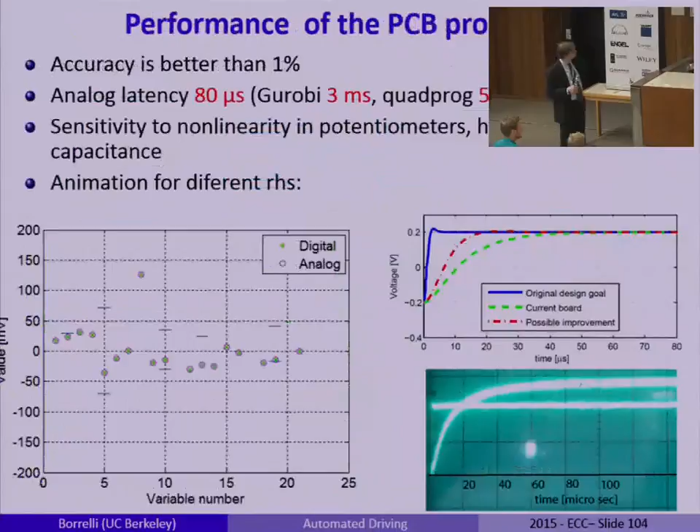So what are the challenges with the negative resistance? There are two challenges. One is stability, and this addresses that challenge - if you slow down the operational amplifier, you have no problems. The intuition is that you have a negative resistance, a capacitor, and a positive resistance. You basically want to discharge to the positive faster than what you're charging through the negative resistance. That's the basic intuition, so you have to slow down the negative resistance. You can do that - the challenge is that the circuit becomes slower, but you can do it in microseconds, as I showed you.

The biggest challenge is actually that the negative resistance is minus these sums, and these sums are the input of your QP. So it has to be exactly the sum of this, or 1 divided by the sum, and this matching is the more complicated part. Especially when you use a digital potentiometer on the board, you have nonlinear effects - they don't match exactly, and if you don't match exactly, you're not solving the QP problem. That's why in the VLSI approach we went to this switch capacitor method. This is a problem the VLSI community knows very well, luckily.

Okay, other questions? Alright, there is a question over there.

What is coming? Assisted systems are out there. We didn't have enough time, but actually this is the biggest problem today - people are misusing the assisted system. There's a video on YouTube, I'll share the link, of somebody in Europe sitting in an Infiniti, which has a lane keeping system. It means you turn it on, it keeps the lane and keeps a given distance from the front vehicle. The guy goes in the back seat and records his vehicle.

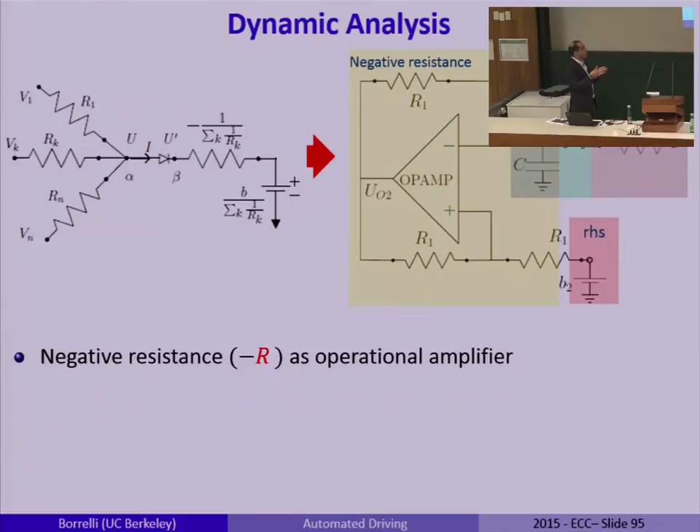It's a very good point. First of all, the whole approach doesn't depend on the way you generate forecasts - you can generate forecasts with uncertainty, or nominal forecasts if you like. When do you need uncertainty? That's a very good point. The biggest challenge really depends on what type of problem you're solving.

For planning problems, where you need to know where the other vehicles are going, that's where you need some type of Markov process - this is where it's bimodal, maybe the vehicle is steering, and this is multiple seconds ahead, 5 to 10 seconds. For the next millisecond or 50 milliseconds, you don't need any of that.

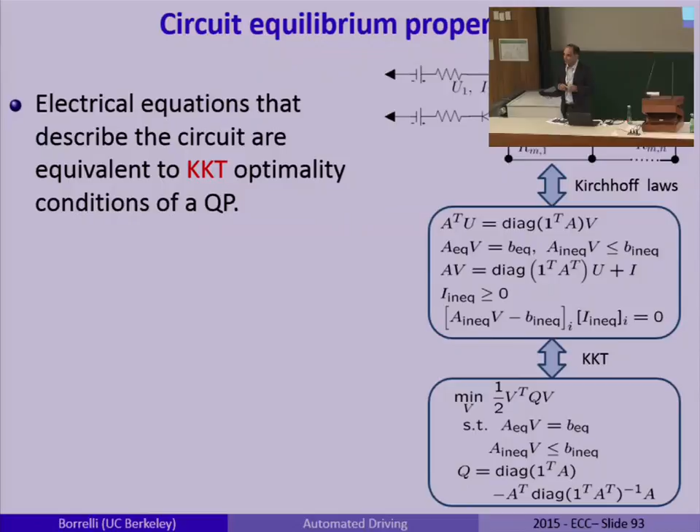Okay, so maybe it's time for us to thank our speaker for a really excellent talk.